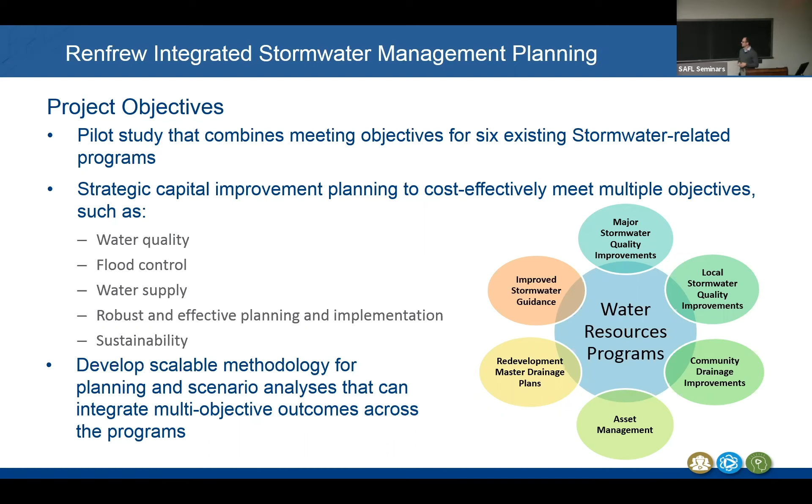So giving you a little more context of the city of Calgary, and specifically the Renfrew neighborhood, it's a low and medium density residential area experiencing significant infill development. Now, what do I mean by infill development? That's that small lot by lot development, not whole scale redevelopment where we have entire blocks, for instance, being developed. It's really on that lot by lot scale.

With that infill development, they're noticing that there's the potential for localized flooding, basement backups, aging infrastructure. These are issues that they're already struggling with in a lot of these areas as they're being redeveloped. And then the receiving water, Nose Creek, is getting greater discharges of suspended sediments and phosphorus.

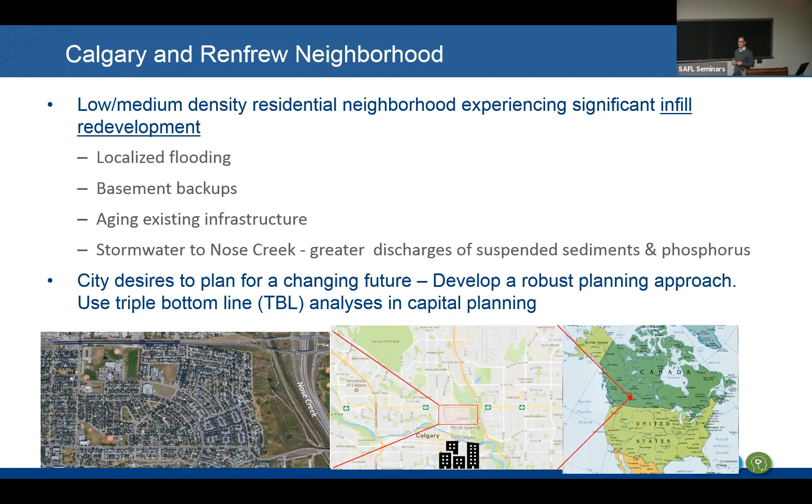So it's on the north side of the river. Downtown is on the south side of the river, as shown kind of in this middle graphic. But the important part about this particular community is that it's very accessible to downtown. So you can bike there. You can even walk from there. It's probably about a 25, 30-minute walk. But this area is experiencing the redevelopment because it is so close to downtown. It's very commutable via bike. So this is that context of that infill development.

The difficult part about it from a policy perspective and a planning perspective is it doesn't often meet, for instance, in the US, we often use a 1 acre size threshold before we really have to do a lot of stormwater management on site. So none of these, similar in Calgary, are going to have to do any stormwater management on site because they're a lot by lot development, right? So that's part of the infill development. Now this, of course, is going to create some challenges.

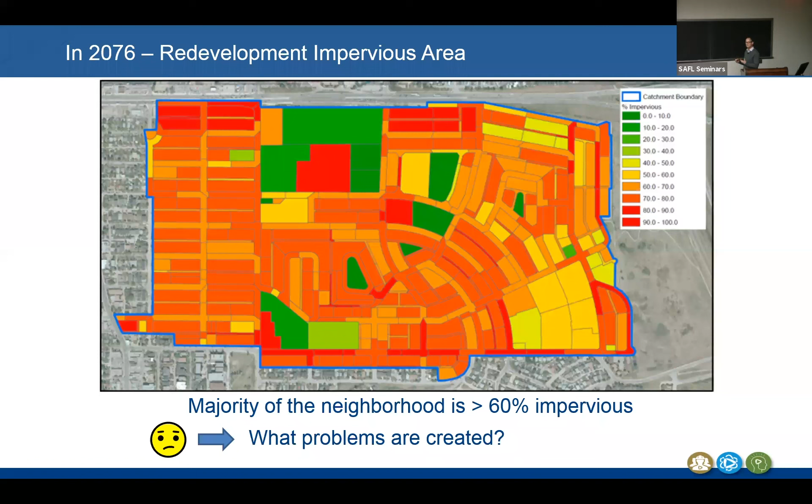So those are going to have some consequences, of course, on both our drainage infrastructure as well as our stormwater on-site infrastructure. So we're often dealing with these problems that this kind of increase in impervious area is going to create, right? As stormwater managers, we're thinking a lot about this. But now projecting out to 2076, how can we develop tools to be able to try to address this so that it's not going to be a problem in 2076?

And the other thing you should notice is that these problems do exist, right? So we do have problems. We do have some localized flooding and so forth happening in certain areas. And so even though we're up above Nose Creek there, it's not widespread and we don't have a whole lot of them, but they do exist. And so with that increase in impervious area, we don't expect these numbers to go down. We actually expect those numbers to increase.

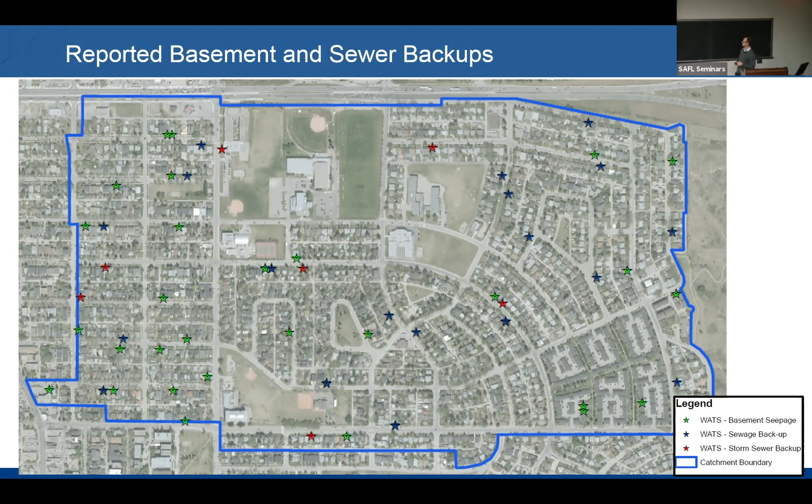So as a part of the project, we're looking at this idea of integrating all of those programs that right now have been really operating in their own program and bringing them together, because we have similar targets in a lot of these programs. And so similar to what we're doing in the US with integrated plans, the idea is that we're bringing the drainage and supply and even roads and drainage with our road systems into one framework where we can look at all of those aspects at one time.

So with that, we're trying to manage, of course, water quality, which is a major driver. I mentioned the issues with TSS and phosphorus in Nose Creek. We're providing flow and flood control in this system. Again, with that, the increase in impervious area, we know there's going to be challenges in the future.

Considering how to improve water supply. We have, of course, our traditional supply mechanisms, but we see that with growth in the future, it's likely that the water supply is going to have greater stressors on it as well. With the redevelopment, we want to be able to develop in a way that's smart and sustainable. And so how do we consider those aspects? Because we know that right now Renfrew is redeveloping, but it's likely a lot of the other areas near the city are going to go through that and experience the same issues with the redevelopment.

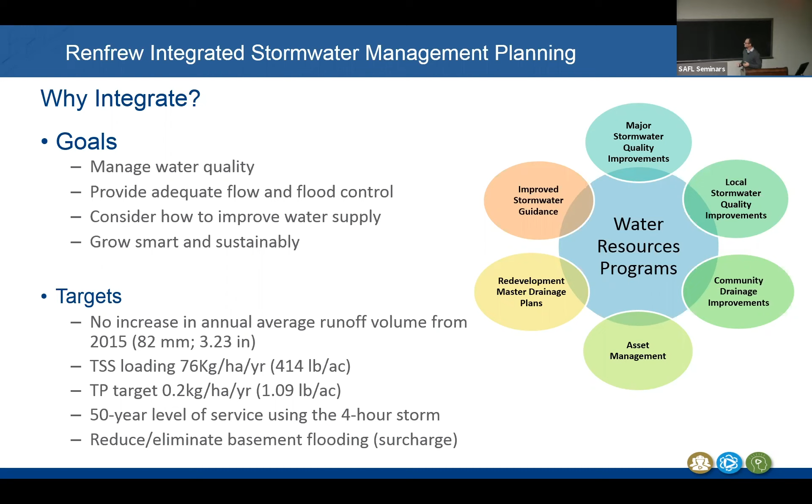The other thing I should point out is that they have a dual drainage system. So a lot of times we're representing the surface drainage and into the inlets in one part of the model, and then we have the drainage infrastructure, all the pipes and underground systems, in another layer, and we're connecting those at those nodes, the catch basins and so forth. So in that way, we're able to represent some surface treatments differently than our underground treatments.

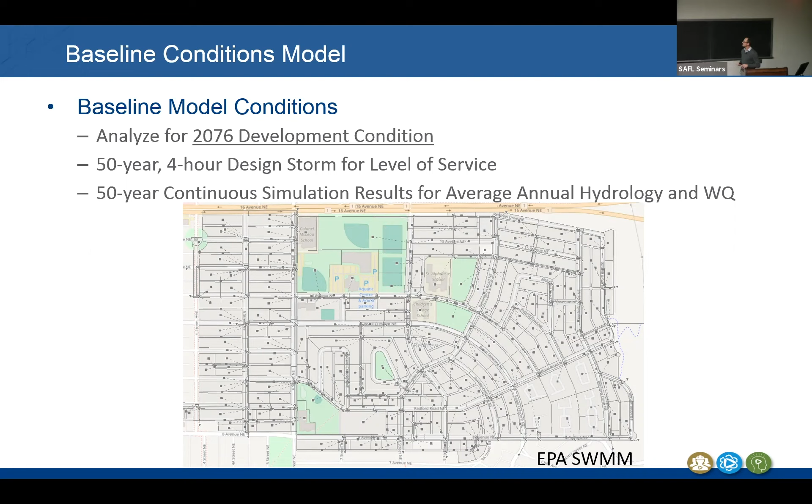So in this baseline scenario, the projections are the redeveloped lot runoff increases by 800%. Okay, it's a pretty sizable number. Catchment runoff increases by 190%. TSS loading 160%. And flood damages, which are again localized here, it's really local flood damages, increased from about 12 million to about 90 million net present value. That poses a potential problem.

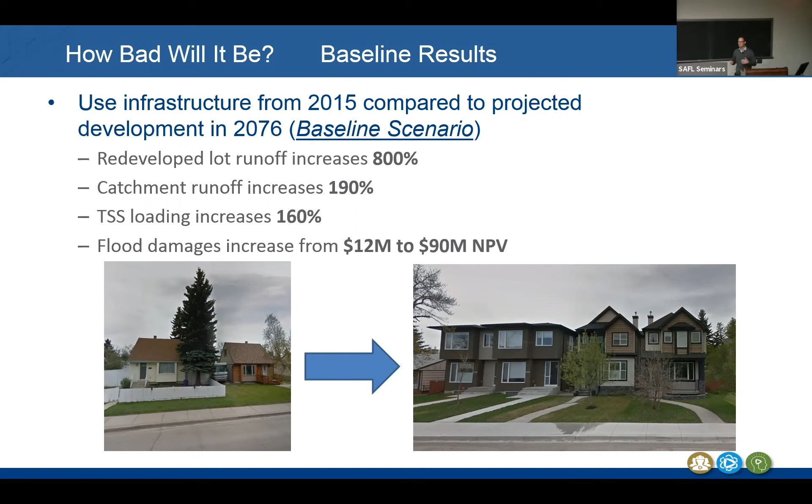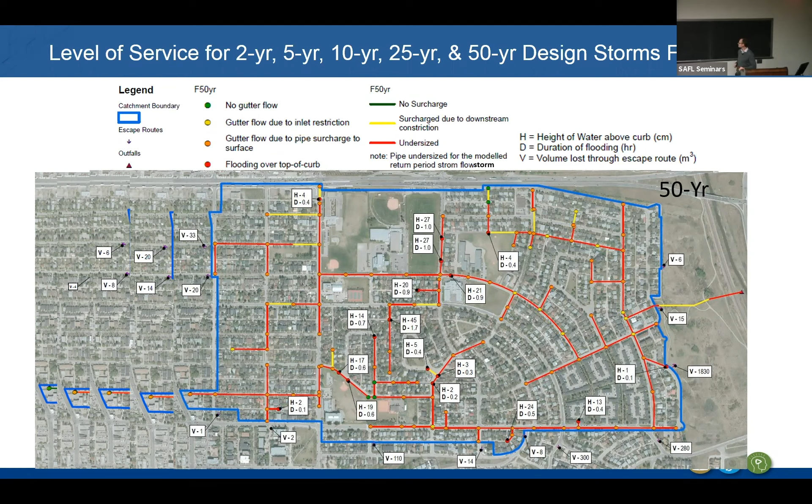All right, so that's the baseline condition. Now, what kinds of things can we do to help manage that in the future? We're looking at gray infrastructure because we know that the pipes are going to be undersized. And there's multiple ways to deal with that. We can upsize the pipe, or we can do storage and delay on the surface.

And so, we're looking at things like upsizing pipes, inlet control devices, and you'll hear me say ICDs. That is just an orifice constriction plate that often goes in the catch basin that is slowing the flow down. So it's actually allowing it to back up, maybe even to get some ponding above the rim in the street storage, but then slowly releasing it out. So we use that in some places in the US, but not as frequently as they use in Canada. Oftentimes in the US, those are used in combined sewer areas and so forth.

Community underground detention storage, again, a frequent practice that we use here. We're putting that in the gray infrastructure. And then paved rear lanes. This was an interesting best management practice, or really a source control measure or stormwater control measure, in that most of their alleys right now are gravel. And with that gravel, if you have a slope, we get a fair bit of TSS loading coming off from those. And so when we started looking at the modeling, we found out that we could do a substantial amount of reduction in TSS simply by paving rear lanes.

Now, it's a little counterintuitive because we're increasing our impervious area, which is something we're trying to counter here, right? But our goal also is to reduce TSS and control the water quality. And so this is one of the ways that, although it's increasing impervious area, we feel like we can manage it, but we can decrease the TSS loading because of paving those rear lanes. So I've put that in the gray infrastructure, although you'll see it in a number of places.

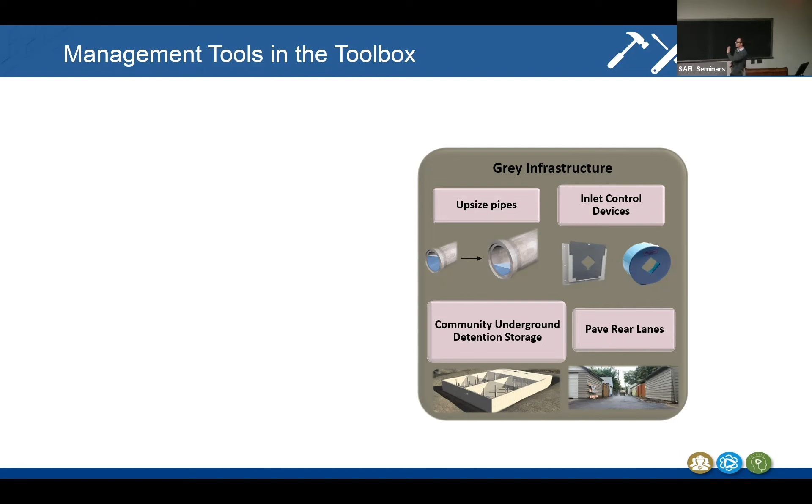The other option is green infrastructure. So we can approach this where we're looking at typical types of source or stormwater control measures like rainwater harvesting, right-of-way bioretention, and community storage even in irrigation. Because remember, we have good evapotranspiration there, and so irrigation can help reduce those volumes as well.

Now, I put this suite of practices here. This doesn't mean that they're tied to this. These are just ideas of ways that we can look at it. So it's not that these are necessarily all the practices that they're going to use or the only practices that they're going to use, but these are the ones we're representing in the models to be able to capture how they function.

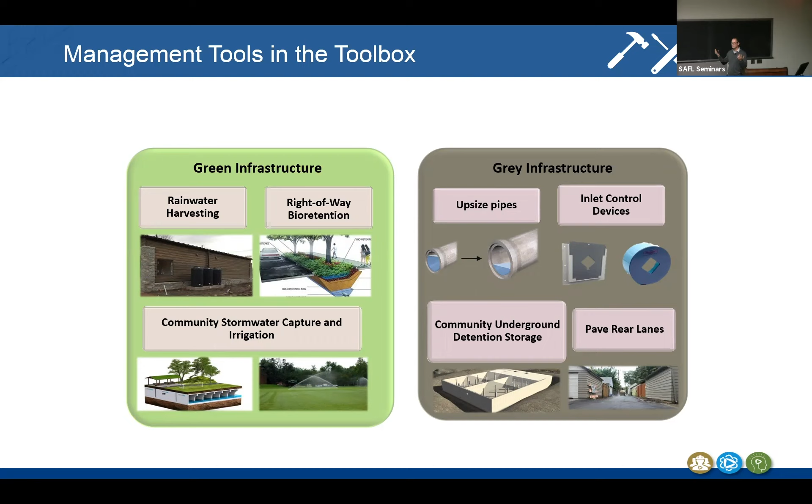Now, when we design things like this, is this an either or? No, we have to be able to keep that toolbox open. So we also have this hybrid of each of those. And this is where the complexity comes in. We have all of these tools. We have a 300-acre situation, and we want to be able to scale that up into something larger. So our typical approach of doing this is identifying where we can do something and then looking at the practices and going through a prioritization and then coming up and say, okay, we can put this practice there and this practice here.

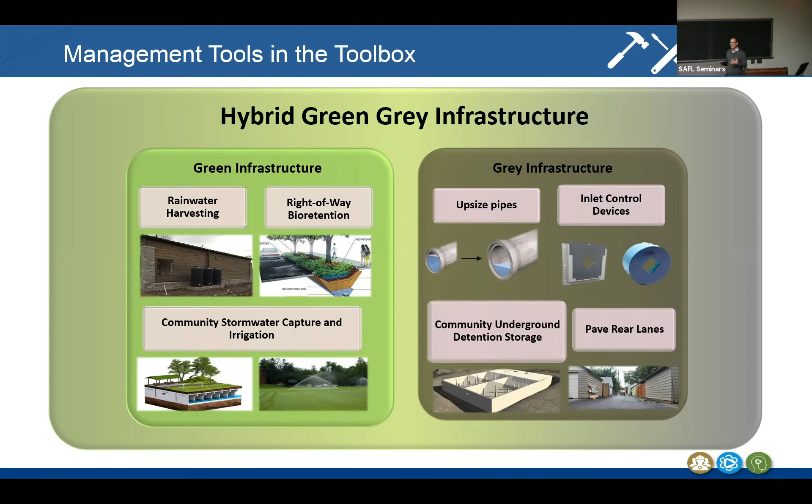Doing this by hand on a site isn't very hard. You could probably even do it on a 300-acre catchment, and it's a challenge, but maybe still doable by hand. But if you start looking at scaling this up, for instance, to a much larger situation, maybe even the size of the city of Calgary, now we're talking a very difficult thing to do by hand. So then we have to think about other approaches for that.

So when we're looking at this integrated management, how do we determine how much of each of these to do? Because that's complex, right? We know that these are tools in the toolbox, but we don't necessarily know how much of each one to use. How do we know where to actually put it? We often say, well, here is a localized flooding issue, and so we need to start here, and then we work out from there. Remember, we're predicting our redevelopment in this, and so we don't always know exactly what it'll be, but we can have these predictions, how much of each to put in each of these locations, and then really, ultimately, how to do this cost effectively.

Because that's what's really going to be the biggest issue is how do we pay for this? And that's a huge challenge. And again, something that I think is doable, but by hand is very challenging. So remember, back to our goals, no increase in volume from that 2015 number that I showed you before. We're trying to manage water quality. We're trying to limit and localize street flooding and eliminate basement flooding. And this is the toolbox that we're using to try to do that.

Are there other tools? Yes, there are likely other tools that we could do this with, but these are the ones we're starting with and really trying to analyze. And by the way, these are quite complex. To recognize that this is going to be quite a bit of effort is true.

So that's my watch telling me I need to move. All right.

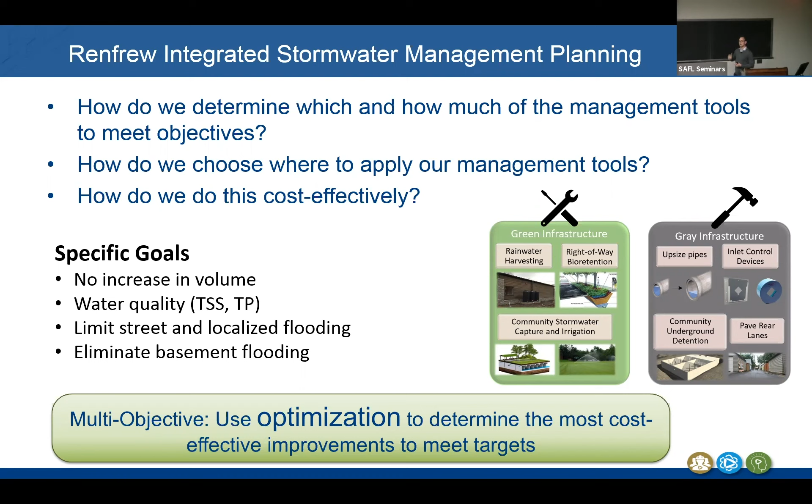So on the optimization, we use a tool called Optimizer, which has been developed by a company called Optimatics. Josh Cantone, as I mentioned at the beginning, is a part of that company. So we work pretty closely with Optimatics on this. We often try to keep things in the public domain as much as possible, but we found that their tools are very useful and provide a lot of value. They've been willing to work with us, so we do a lot of coding back and forth where they have their optimization.

And basically, this is kind of an optimization wrapper that works around SWMM, by the way, or InfoWorks or a number of other models. So it has that capability. But we were able to make those linkages, and they've worked with us to help represent, for instance, a lot of the green infrastructure, because this optimization model was originally developed more on the gray infrastructure type of systems.

So for this particular application of Optimizer, what we're doing is we're defining infrastructure. The goal is we're defining a scenario of what will be used, and how we're going to do this is based on the different objectives. We take that, we run the EPA SWMM, we look at volume and load reduction, and we look at costs. So for the SWMM, we're looking at the hydraulic performance results, and then we look at the volume and load reduction. So now we're looking at water quality performance, and then we have to look at the improvement costs.

We take that and we look at what's called a total scenario fitness in Optimizer. And by the way, what if you don't meet that objective? Is that okay or is that not? I'll get into a little bit more of that, but that's called a penalty cost. So for instance, if you're not meeting your objective, you might get charged a penalty for that. And so that's the way we look at the total fitness, which ends up looking like a total cost for each of these aspects. And that's how we evaluate whether the scenario is good or not in the optimization framework.

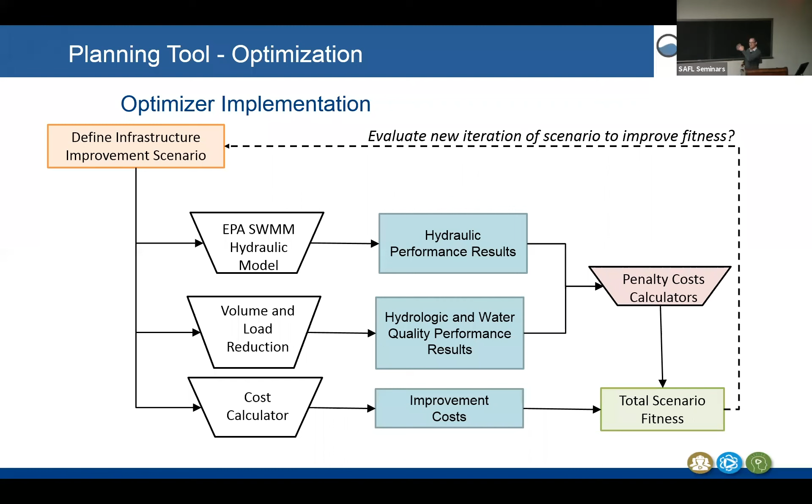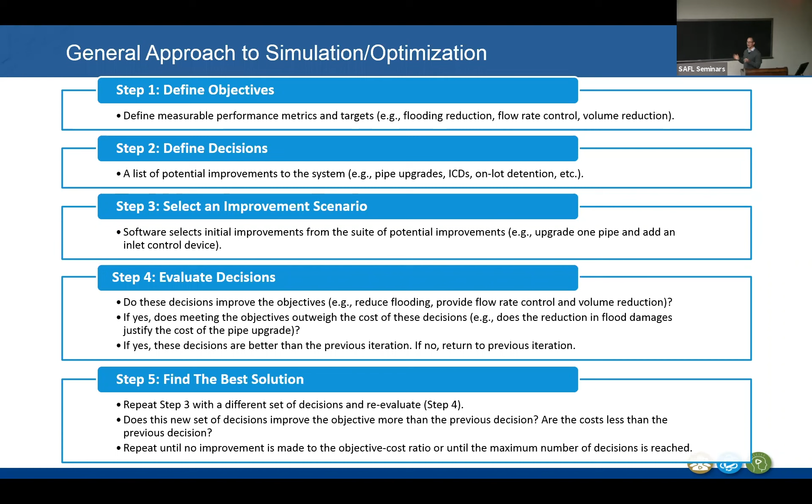So real quick, these are the general approaches for the simulation. I'm not going to go into detail, but just to say we're really defining those objectives, which I've kind of presented to you. Defining decisions, I'm going to go over a matrix of what those look like. And then we're selecting improvement scenarios, evaluating the different decisions that are going into this, and then finding the best solution. Now I've used the term optimization. Here I'm calling it best solution. When I talk about the solutions that we're getting, I'm going to call those near optimal, because I don't necessarily like the term optimal, because we don't necessarily know what optimal is. I'll call them near optimal. So bear with me on that.

So the different scenarios that we looked at. This is really what we use for our matrix here. We have our planning criteria. Those look like: we can upsize pipes, we can use inlet control devices, we can use community storage. We're looking at bioretention, right-of-way bioretention, on-lot cisterns. And in this, we looked at on-lot cisterns from an individual lot versus grouping them on a larger scale. So that's the group or independent.

And then we have our design criteria that I pointed out. We have street flooding, so that was one of our criteria. We have system overflow: is it leaving our catchments that we want to control? Junction freeboard, so now we're looking at our depth at each of those nodes. Peak discharge, annual volume, annual TSS load, and we have a hard target and a soft target. So annual volume hard target, and TSS load hard target, and then both of those two as a soft target.

Now, what do I mean by hard target and soft target? Because this is actually quite important. And by the way, you can see the different matrix here of what we included in each of these. Up at the top, we have pipes and ICDs. So that's mostly the gray infrastructure. Pipes, ICDs, and community storage.

Now we put some community practices, and that can be mostly gray storage, but we can have surface community storage, so that can include a little bit of green storage. So those are the twos. When you see any of the three scenarios, those are essentially our green infrastructure or stormwater control measures only. So scenario 3 is essentially saying we're only going to use green infrastructure to manage those issues and to try to meet these design criteria. And then scenario 4, and we did six of those, are all the hybrid potential scenarios.

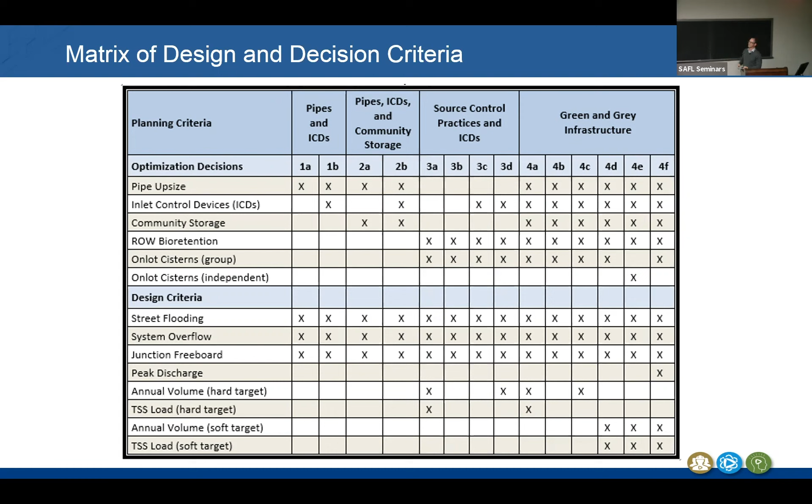We have load reductions. And the other one I'll explain here: the City of Calgary and other places often use this, we use this too, but they call it the I to P ratio. So that's an impervious to pervious ratio. The impervious, of course, is our drainage area and the effective impervious coming from that. The pervious is actually the footprint of whatever we have.

So for instance, for bioretention, it's that footprint that it has that we're calling pervious. So what it essentially is, is our ratio of drainage area to our practice area. Simple as that. And so if we're in the I to P ratio of 10, we're talking about that practice, the size of the footprint, is about 10% of the drainage area. And we go all the way up to 40% on that, or a ratio of 40 I to P.

We also looked at different aspects of infiltration. So we looked at 2 millimeters an hour, 5 millimeters an hour, and 10 millimeters an hour. We actually ultimately ended up using 2 millimeters an hour to be conservative, but we wanted to understand what that change would have on our optimization process.

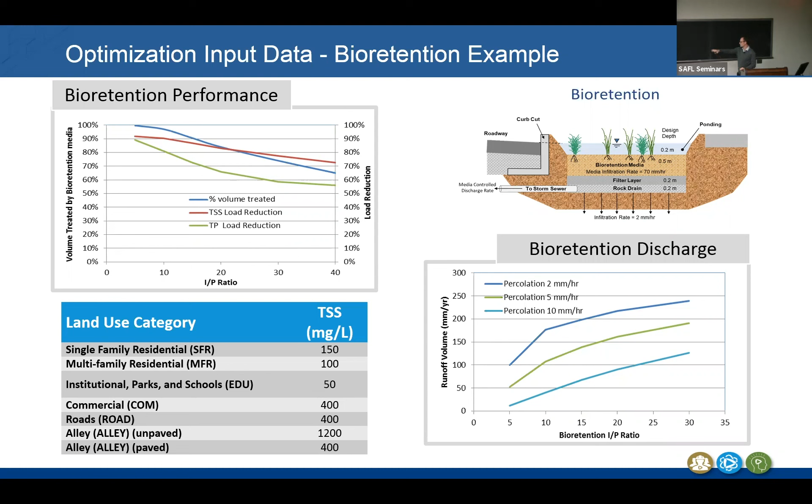Here's some of the cost data. And again, some examples here. So we have underground storage costs. We have surface storage costs. And by the way, this one, because that size of practice is so specific, we actually said, okay, it can only go in this location. So when we're doing the modeling of that, we had identified 3 locations throughout the catchment where we'd say, this is the only place where this can go. But now we're including that as a potential storage node in there. And so we're seeing what kind of effect that will have through the optimization process.

Right-of-way bioretention on that underground storage. By the way, we did cisterns for both underground and above ground storage. And we represented those cisterns as both a retention component and a detention component. A retention component as a reuse. So we said there's so much reuse each time. We want to try to have a part that we're maintaining within the cistern to be able to have available, for instance, for in-house use or irrigation. And then a detention component where we just control that more based on orifice flow, where it would store it more for that peak flow control and then release it over time.

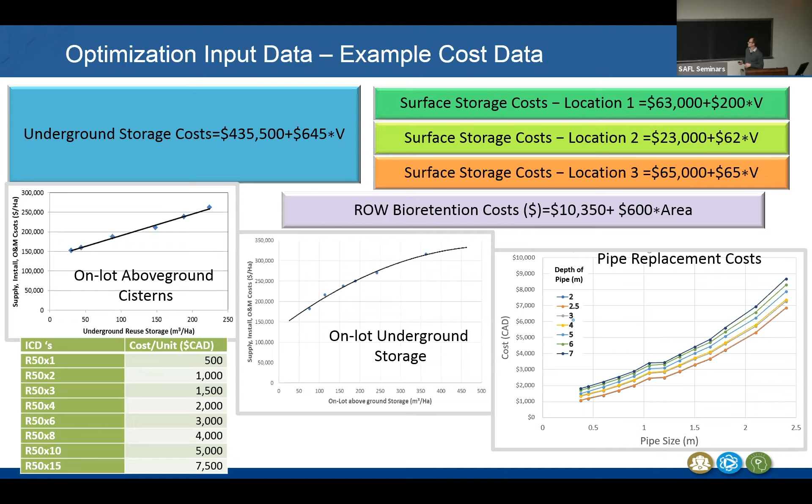Surface property flooding, so we have some costs for that. So if it gets up above a certain level, we start having higher costs. And then freeboard penalty per manhole. So this is where when we get over a certain amount, now we're starting to get flooding of cars, for instance, that are parked on the street. And then our costs increase substantially from that. Again, based on the freeboard of those.

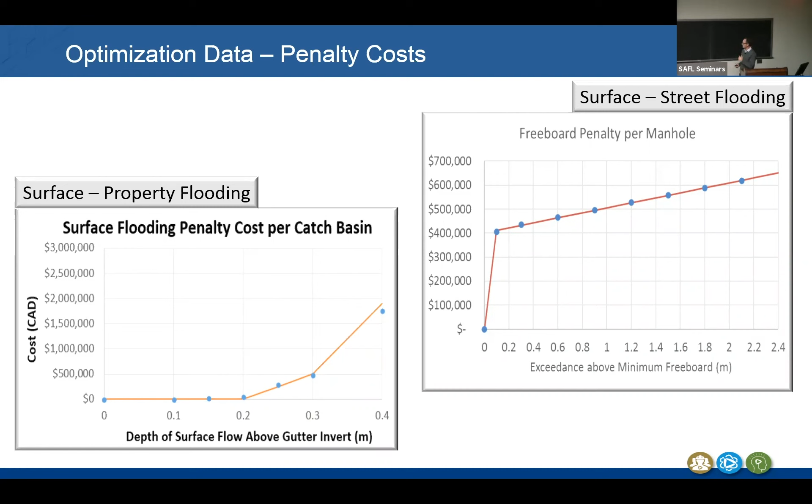So I mentioned that fitness solution is how we're evaluating this. And this is, for instance, an output of what the optimization looks like. And what you see on the far left side of this graphic is that it starts out with a scenario, right? Or a number of those different components. And it's trying to meet a certain objective. And it starts out with an idea. Okay, we'll put this many of this, this many of this, and then it starts evaluating that. And it comes up with an answer, and then it says, well, okay, is that a good answer or not? Well, we don't know. We need to have it compared to the next one.

So it runs it again, and it changes one of those. And then it gets an answer and says, well, can we improve upon that? Is that better or worse? If better, well, let's see, can we improve on that? And it does another iteration. And so this is the process that it goes through. And you can speed this up, by the way, by seeding it, by giving it a scenario to start with. So oftentimes you can speed it up.

But what I'll show here is that when we look at the axis at the bottom, this is the number of evaluations. And you'll notice when we start getting down here at this part where it starts getting kind of asymptotic, we're up at 40,000 evaluations. Now, remember when I said this is hard to do by hand? Can you imagine doing 40,000 evaluations by hand? And by the way, this is one of the easier ones that we did. This is one of the simpler models that we did earlier, where we just had a few changes. And so we had some that were over 400,000 evaluations total. So part of the optimization is to be able to look at all these potential different solutions and understand what that means.

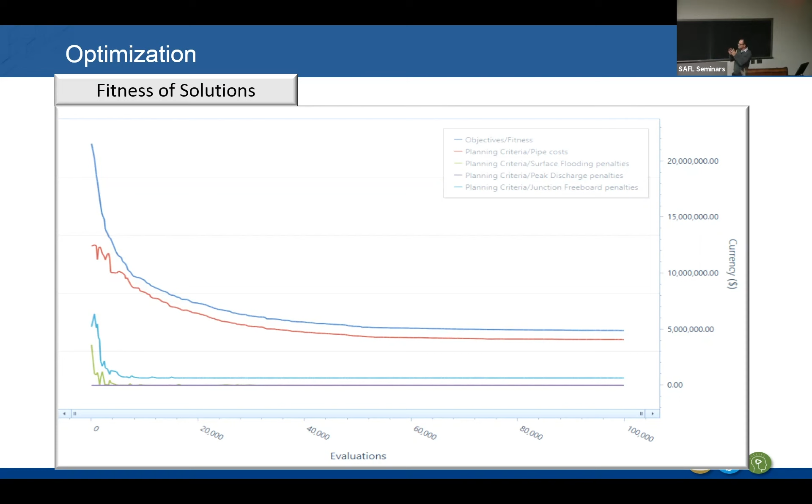Now we use this approach to be able to define those scenarios that meet those objectives. So I gave you that matrix that had all of those objectives. We actually ran it 17 different times looking at those. And by the way, there's a whole bunch of other ones in between that we were kind of trying to define the scenario. Well, should it be this, that? So what does that look like? So just to now give that more of a picture here.

So now I'm looking at scenario 1B. And this was primarily inlet control devices and storm sewer upgrades. So we're just increasing pipe size and putting in those inlet control devices within our catch basin. I've shown that through this image here. I'm calling this a gray infrastructure. Maybe hard to tell, but this is a gray box here. So we're putting our inlet control devices to restrict flow, and we're upsizing our pipes. The red there is showing the increase in that pipe size from the black.

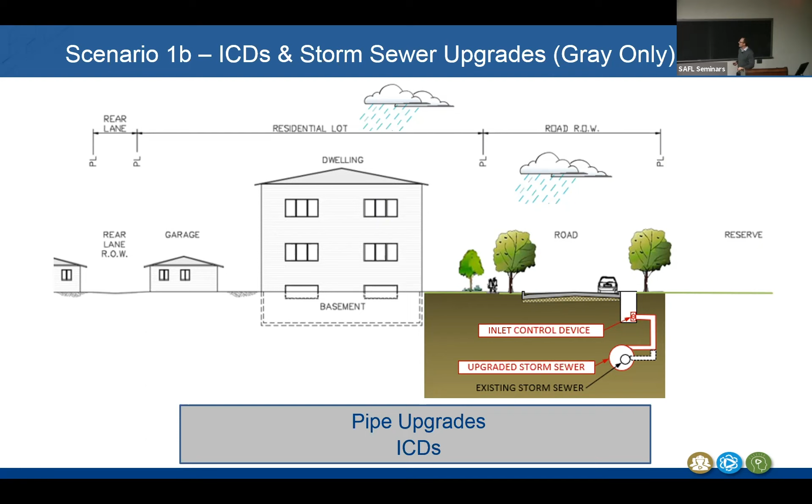And so that's one of our tools that we have in our toolbox. We want to understand how that works. So we went through and did that, and we have some results. The next 6-8 slides are going to look like this, where we're looking at what the scenario is to define it, and then we're looking at the results. And by the way, it has a graphic over here that's showing what the improvement decisions look like in terms of pipes and nodes for the ICDs. So this one's showing the number of ICDs and the pipe upgrades. And then we have some cost evaluations in this because that's a part of this as well.

And by the way, I've included the baseline. So that 2076 condition, the do nothing condition. And this is what we were getting. With that baseline condition for catch basins with max depth greater than 0.2 meters, we were having 55 of those. Manholes with less than 1.2 freeboard, and by the way, the freeboard is measuring from the bottom to the top, so reducing those is better. So the baseline was 136, we have 83.

So if we look at this, we've improved on our catch basin depth, right? For our number of systems that have that catch basin depth or that are lower than that. For manholes, we've improved on that. We went from 136 in that baseline condition to 83. In the next one, 50-year design storm overflow volumes, we went down from over 2 million liters down to a nominal 600 liters. I would call that pretty close to zero as far as modeling is concerned.

For our peak discharge, we went from 5.2 to 9.9. Wait a minute, that's up. We increased that. Why? What were our tools? We increased pipe size. Did we slow down velocity? Yeah, we put ICDs on, but we now have larger pipes. And so we've actually resulted in an increase in our peak discharge. Is that counter to one of our goals? Yes. So that's not good. So I have a red X for that.

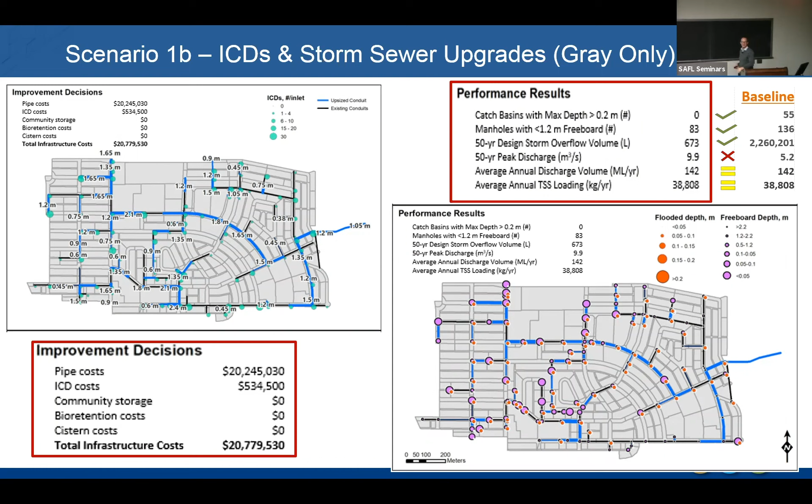Okay, so now let's look at scenario 2B, where we're using regional storage and storm sewer upgrades.

Okay, need to finish up in here.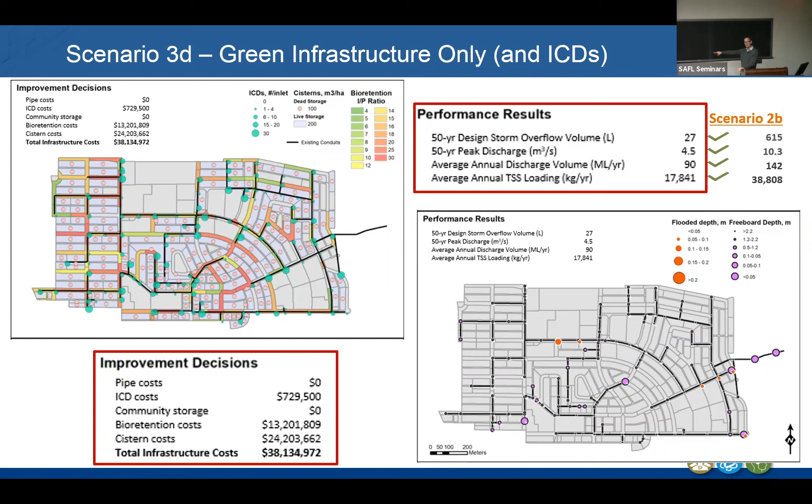Now, the one thing I haven't been pointing out on these, and I probably should go back and point those out, is the cost. Did anybody notice the cost on that first scenario? About 20 million. How about the second scenario? About 20 million. Now, those weren't really meeting our objectives. What's the cost on this one? Almost 40 million. So we've now substantially increased. We're meeting our objectives, but at a cost, right? So now we're at 38 million.

So let's now look at the hybrid scenario. Now we're basically throwing everything in there. We're looking at all of this stuff. I can't remember, I think it's 4D that we're looking at. It might be 4A. So I'm not necessarily going to the hard soft cost on this, but this is basically everything. If we put everything in there that's available for us to use, what does that look like?

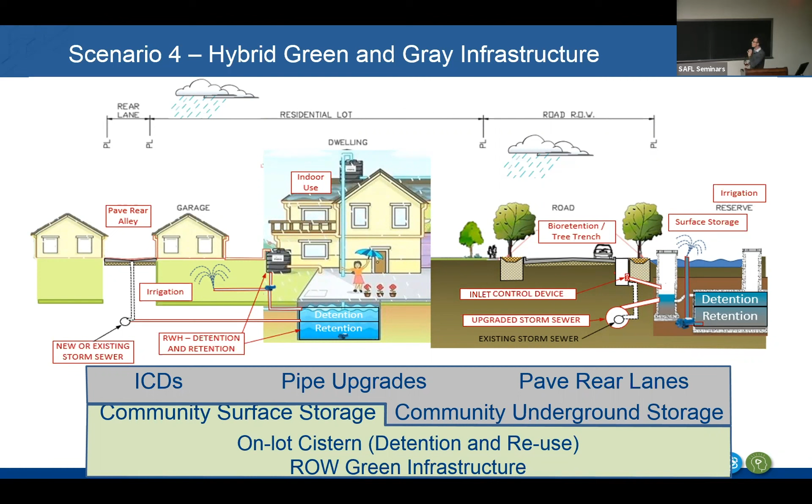What you might notice from just simply looking at this graphic and this graphic is we don't have very many problems. We've upsized pipes, so we don't have flow problems and so forth. And we've got management in a lot of the places. A lot of them are the right-of-way bioretention. So these colors along the right of way, or the streets, are bioretention. And we've reported it, by the way, as an I to P ratio. We've got some cisterns in places. We've got the ICDs.

And what do we notice for our performance results? We have nominal overflow volume now. We've got maybe the same for 50-year peak discharge, but this is actually near our target anyway. And then we have average annual volume that's maybe not quite as good, but it's not too far off from the green scenario, which we said was a substantial improvement. And then we got relatively similar loading for TSS. So not too far off from it. A little bit above it, but maybe not quite the same as the green infrastructure.

What do we notice about the cost? We went down to 32 million. So we've got a 6 million savings from looking at a hybrid approach. Now, is it more than the 20? Yes. But did the 20 meet our objectives? No. So this is getting more towards our idea of something that meets our objectives and is cost efficient. So it's on that least cost side of things.

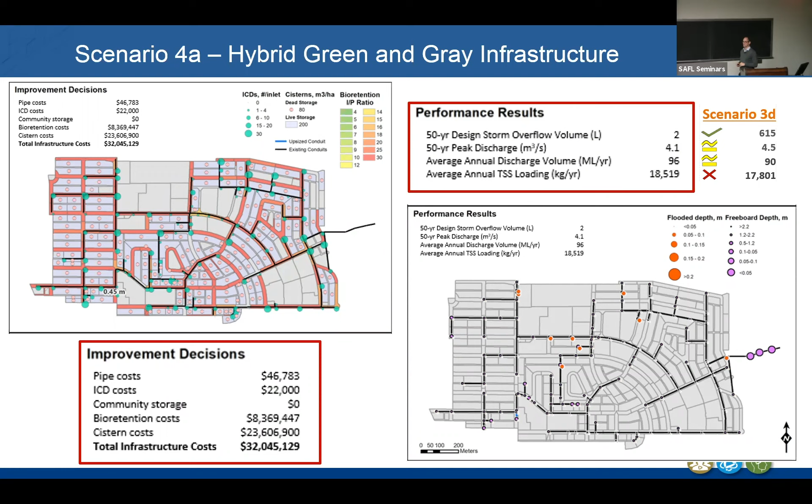All right. So the last part I want to talk about, and I'm getting short on time, so I'm going to zoom through this a little bit, is the triple bottom line aspects. These are the kinds of things that we looked at for triple bottom line, everything from health benefits and construction impacts for more of the social side. We did look at life cycle costs. We looked at flood reduction benefits.

We looked at property value enhancements. And then for the environmental, we used some of the same things that we looked at overall, providing some values for those for the water quality, volume peak flow reduction, water reuse, supply exchange, construction impacts, air quality impacts, things like that.

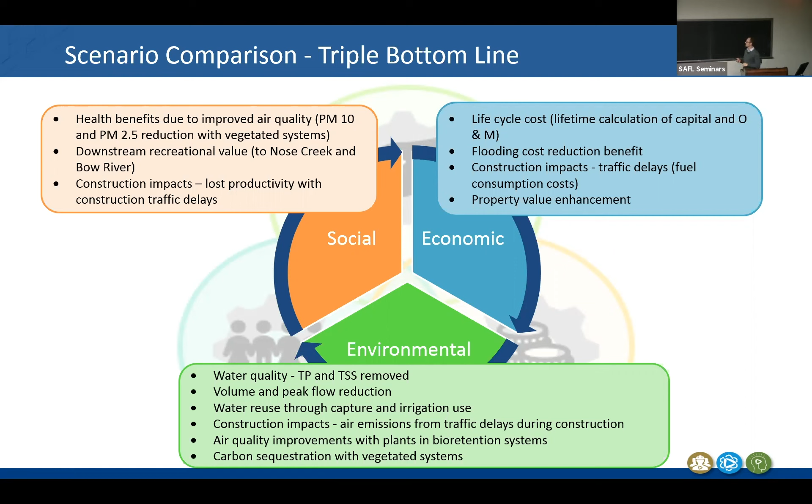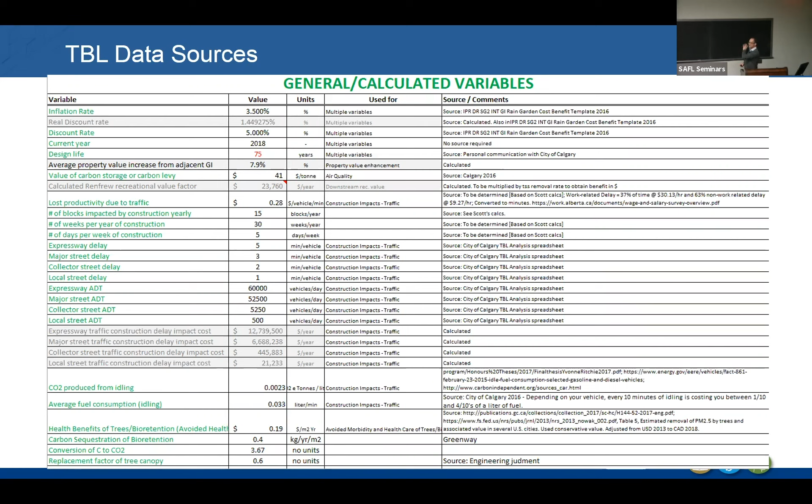So I'm going to show you this graphic here, and I know it's way too small for you to read, but what I want to do is talk about the types of data that we used, and this is, by the way, the spreadsheet that went into our triple bottom line analysis. What I'd like to point out is that the values are based on real and local data. There's a number of tools out there that do triple bottom line. Oftentimes, they're not necessarily tailored to the local environment where you're doing it.

And so you'll notice a lot of this stuff has Calgary numbers or City of Calgary. And by the way, City of Calgary does have a TBL tool. We took some of those things. We didn't take them all. The biggest challenge was, for me, as an engineer and a scientist, I want this to be something that is well supported by science, that I can give it to any academic, I can give it to anybody else, and they'll say, yes, well supported, check that box, and by the way, transparent.

So I want it to be transparent. I don't want these numbers to be hidden by anybody. I want them to be out there to say, okay, is that value good or bad? And I'm not saying that all these values are great. I'm saying that's what the literature said. And so we're using those and trying to tailor them as much as we can, both to Canada and even more so to Alberta and then Calgary.

So these are some of the calculated variables that we use, and it includes things like design life, current year, all the inflation. Those are the typical ones we use, but it has things like local streets and average daily traffic volume, CO2 produced from idling. So a lot of our construction impacts that we see from that.

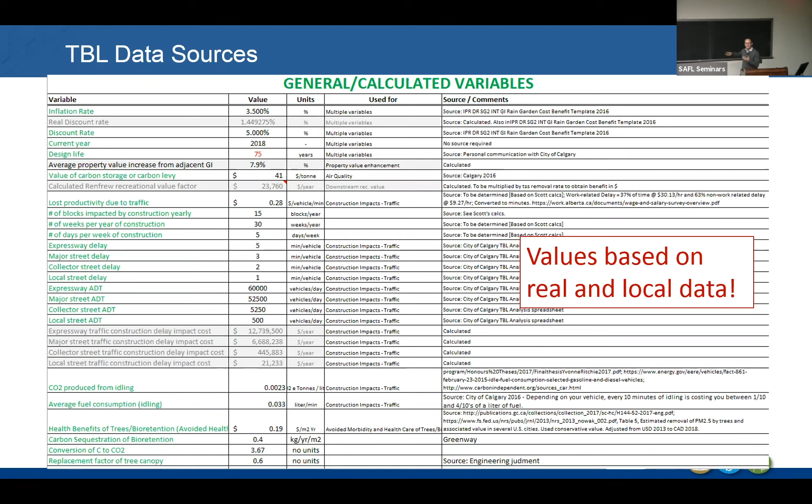Then we have area-specific variables. Again, the point is that this is documenting as much information as we can that's local to Calgary or Alberta and so forth. And so we had this prioritization of the type of information we use. Is it North America? Is it Canada? Is it Alberta? Is it Calgary? And that last one, the fourth one, is really our highest priority data.

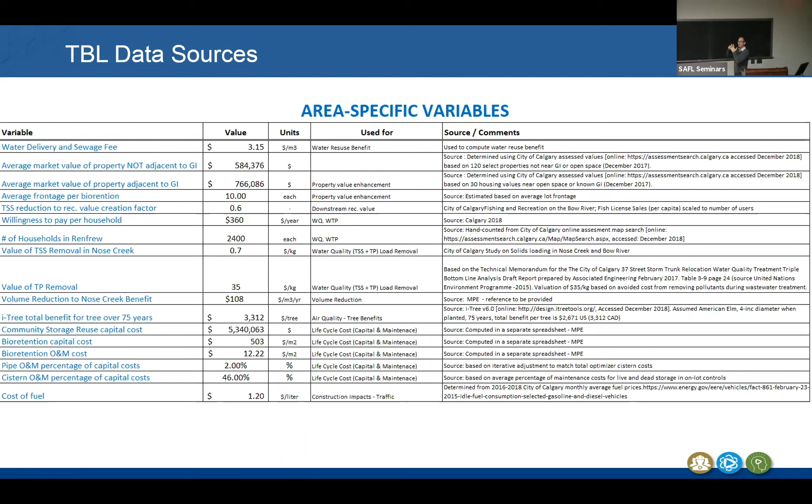So again, values are as much as we can based on real and local data. Real data, by the way, that's the other part of it too. It's real data. We didn't model it. We didn't pull it out of the air from somewhere else. And I feel like that's important for our tools.

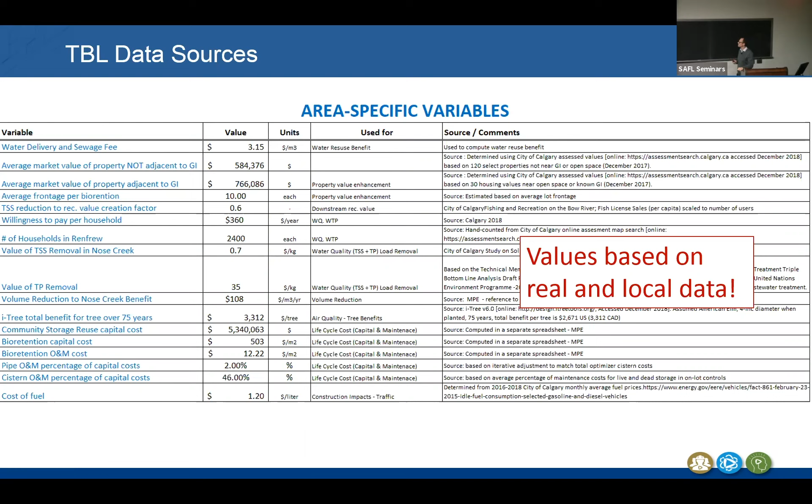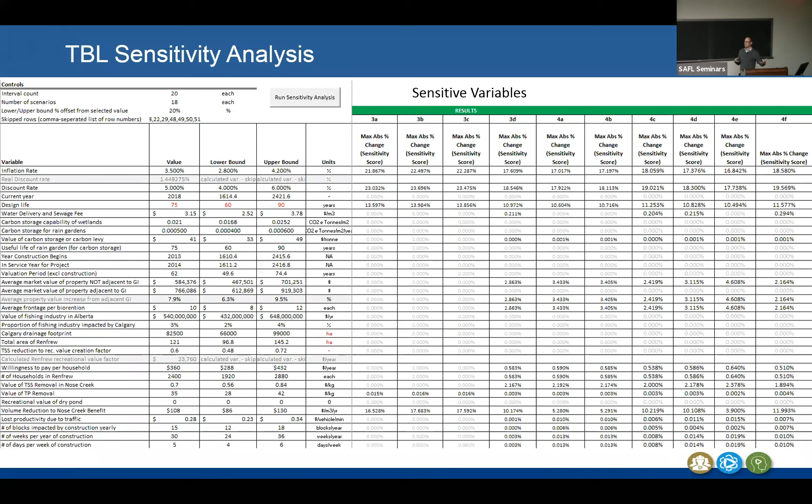Then we took all of that, and we actually did a sensitivity analysis. What we did is we added a little bit to it, we subtracted a little bit from it, and said, how much does our answer change when we do this TBL? Because that's important. If you know the sensitive variables, it's not that you necessarily are going to not include the insensitive variables. Maybe there's a reason you want to include those, but we really want to know the variables that are dominating the decisions.

And so the inflation rate, you might expect, makes a lot of sense when you're looking at a TBL over a long time frame, that inflation rate will matter. Discount rate similarly will matter. Design life, that was very sensitive. So if the practice lasts 15 years, 30 years, 75 years, that's important. Property value we found to be quite sensitive.

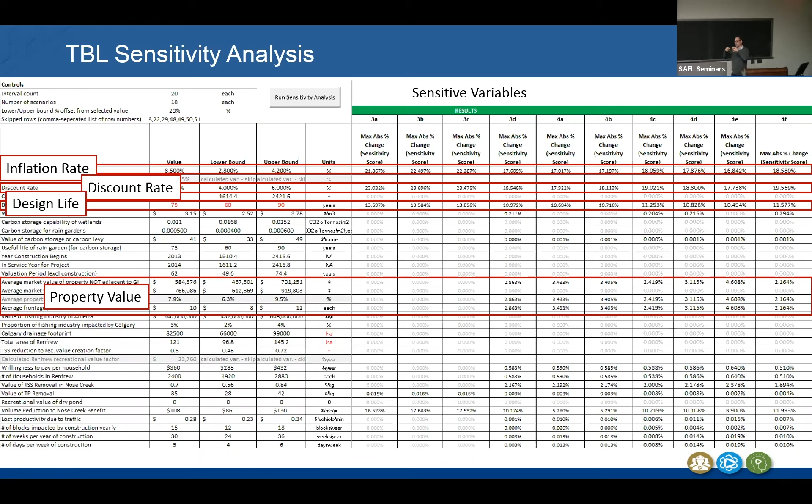And the property value, because we didn't have enough green infrastructure, if you look at the actual numbers there, it says adjacent to green infrastructure and or open space, and not adjacent to green infrastructure and open space. They actually have a pretty robust system, not quite like Zillow, it's actually better than Zillow, with near market prices. We looked at 120 properties that were not adjacent to green infrastructure or open space. Because we don't have enough green infrastructure, we had to include the open space.

And then we did about 30 that were near or overlooking open space or green infrastructure, and came up with those values. We felt like getting a large enough population, we would be able to get some of that variation. And we did notice a difference, by the way, between those.

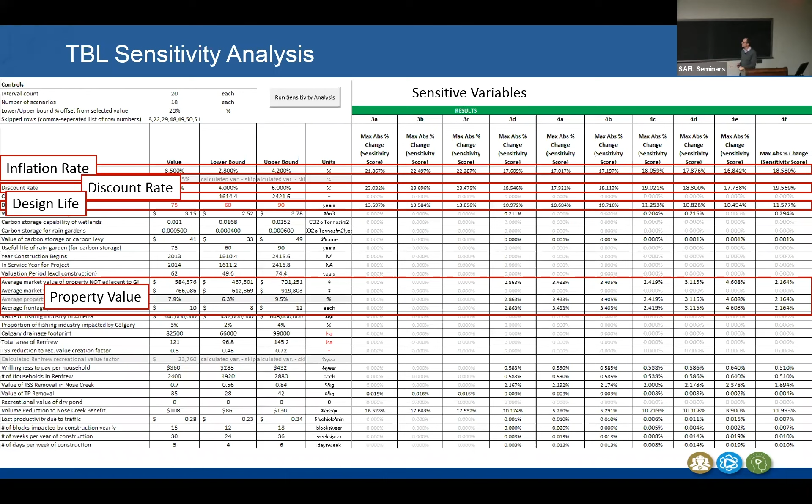But it is a sensitive variable. And then volume reduction benefit to Nose Creek was also sensitive. So I want to go over the scenario comparison. So we developed those scenarios using the optimization framework, and now we're comparing those using a triple bottom line approach. We're comparing scenarios that were developed in optimization, now using TBL.

And oftentimes the best use of TBL, in my opinion, is for conveying this kind of information of what is the difference between the scenarios when we look at this broader scope of potential objectives. It's not for programming dollars. It's not for determining the actual lives saved or anything like that. It's more for comparing your different scenarios.

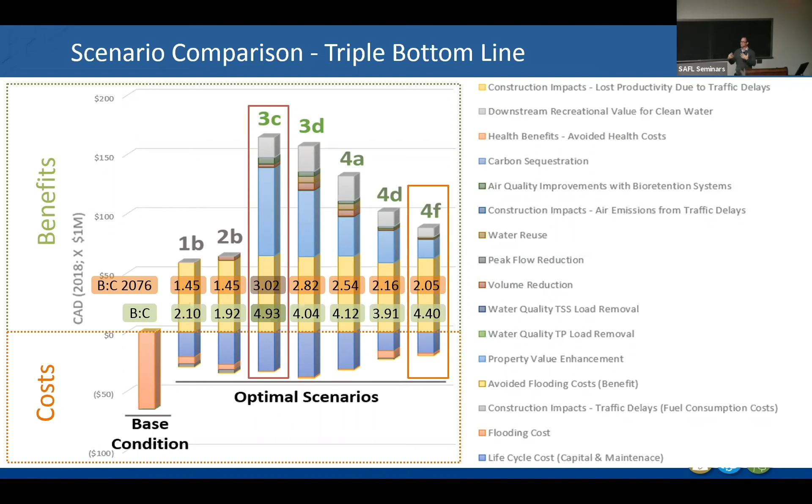So with that, conclusions: stormwater infrastructure planning is getting increasingly more difficult. Multi-objective parameters, all kinds of different flooding, water quality, growth, all of these kinds of things are now coming into play.

Incorporating network systems and effects is critical. Being able to understand that underground infrastructure, the above ground infrastructure, those are all critical pieces of this. Too many decisions to be able to make in my head. You guys are capable of doing it. And so using things like optimization software are going to be a part of what we do in the future. Marcus talked about technology increases. I think this is one of the technology increases that we're going to see as well.

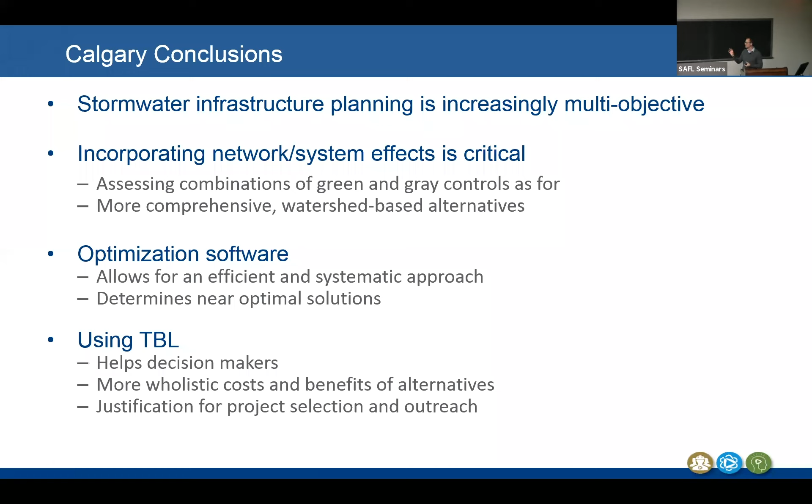Using triple bottom line, great decision support tool. I think it's as much for communicating to decision makers, et cetera, the differences between the scenarios. We're looking at more holistic types of benefits and costs. Again, that's more for a communication tool more than anything. Don't program your dollars on it, things like that. And it provides justification for doing that particular project. So with that, I'd like to conclude and I'd welcome any questions.